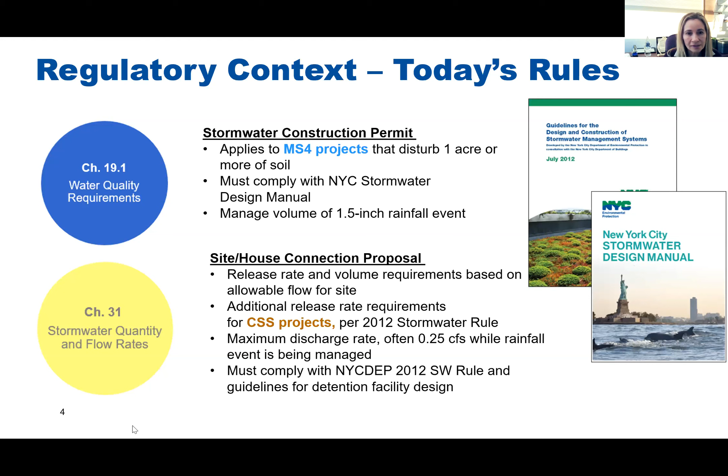And in the upcoming slides, what we would like to really focus on is how these two different requirements are going to be unified under our new rule, which is currently published, and give you enough details on how much work we have put together, working with many of you over the years, so that they are better aligned.

So, just to give you a brief highlight of what the unified rule is: our chapter 19.1 is going to be changing now, not only covering the separate storm sewer areas, but we are extending those requirements to the combined sewer system. So it's going to be one system for stormwater management.

We are also lowering the threshold from the 1 acre, which only applies in the MS4, to a citywide 20,000 square foot or more soil disturbance, and adding the creation of 5,000 square foot. So those requirements are becoming smaller in terms of the soil disturbance, and the spatial coverage is extended from the separately sewered areas to the combined sewer areas. So the system is going to become one system for stormwater management.

By doing so, we are indeed adding much flexibility in the stormwater management design options, which you are going to see in the design manual, which we will walk you through. But also we are simplifying the rules and making them very much consistent across the city. So there's not much more interpretation of how the different rules apply in different parts of the city. So now the stormwater management is going to come under the unified rule.

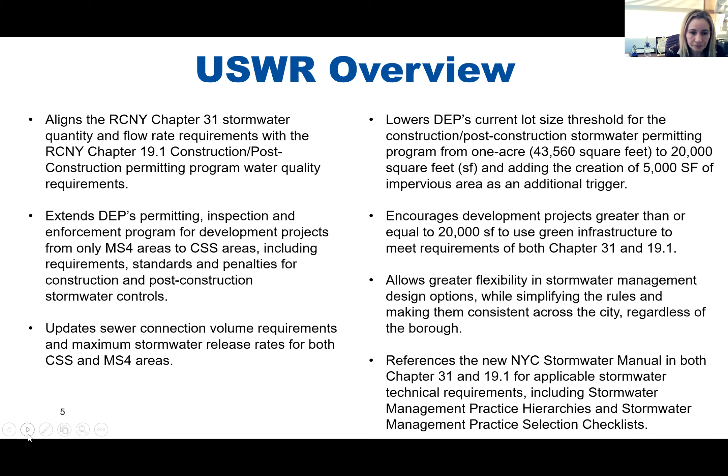Okay, so in creating the unified rule, what we looked at first is what we had, and we had the MS4 rules, the separate storm sewer rules in chapter 19.1, where the goal is primarily water quality, improving the water quality in and around the water bodies in the city. And then we had chapter 31, which really focuses on the system that carries the water, whether it's the combined sewer system or the separate sewer system. It focuses on making sure that that system operates well.

In trying to unify these rules, not only for our own convenience, but so that applicants coming to us with projects can benefit from that unification, we looked at how we could make this work better. So expanding chapter 19.1 into the combined sewer service area means that we're going to be able to have another way to reduce the flows that are causing combined sewer overflows and thereby improve water quality.

And our site and house connections are going to use the same standards throughout the city. So now, instead of looking at where I am and what storm applies in this area and what year map I have to look for this site, you're going to have a standard set of rules to use to size and create your sewer connections for your sewer connection certifications. And in doing that, we were able to create this overlap area of green infrastructure where we can get credit for one for another. And if we go to the next slide.

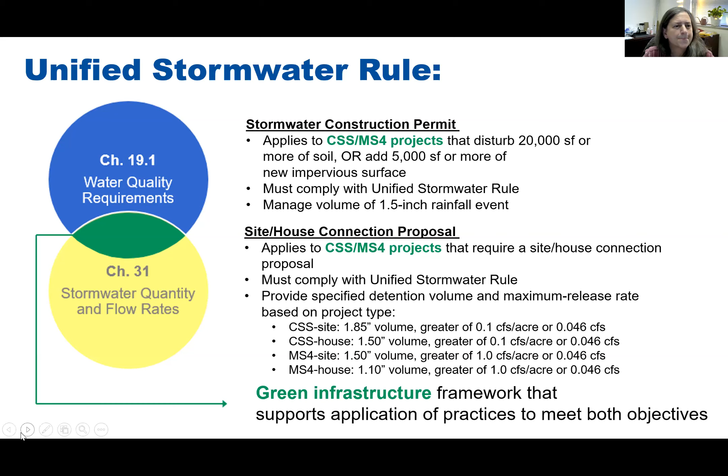So we've designed a new manual to help guide folks on exactly what you can do to get credit for both. So I'm designing one practice now, and I'm getting credit both for water quality in chapter 19.1 and for controlling my flow. Maybe it's one practice, maybe it's a system, maybe it's a group of practices, but I'm using them together instead of designing one thing for one part of the agency and one thing for the other part of the agency. So that overlap, I think, is really going to improve things for all of us, make it simpler, more direct.

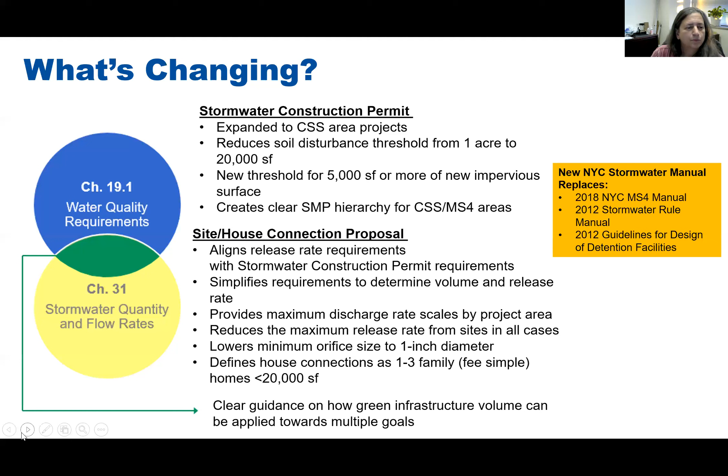Okay. So when we look at what's changing and how to get credit for both rules, we're looking to see what you have to do. Well, what you have to do is sort of the same thing as it was previously. So you still have to create the stormwater pollution prevention plan to cover chapter 19.1. You still have to submit that on the online stormwater permitting and tracking system.

And that plan has to cover erosion and sediment control. It has to cover water quality in terms of dealing with the water quality volume and making sure that we're capturing and treating an appropriate volume. Runoff reduction means we're actually requiring the reduction of runoff on all sites now. And no net increase means that where certain water bodies are receiving flow, we're addressing pollutants for that water body.

Additionally, for the site and house connection proposals, when they apply, you're still preparing that permit application and submitting it to BWSO in the same way that you've always done. But again, the goal is to manage the runoff and to control the volume and the flow that's leaving the site. And that's what's changing, is how much flow you're allowed to leave the site.

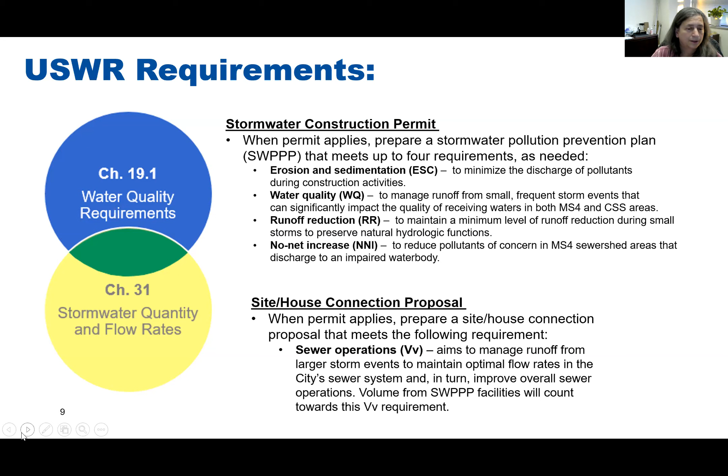So in looking at when don't I need to get a permit: if you're sponsoring a project in the city and it's in an MS4 area, a separate sewer area, and DEC, the New York State Department of Environmental Conservation, has issued coverage under the general permit before June 1st of 2019. That's when the first round, Chapter 19, became effective for the first time. If you have that letter of acknowledgement already, you don't need to get coverage under this part of the program,

under Chapter 19.1. If DEP has issued an MS4 SWPPP acceptance already within the last 2 years from the effective date of the Unified Stormwater Rule, again, you would not be required to get new coverage, but just be careful. It's within 2 years of the effective date. If you have an older approval, and there are just a few out there, those approvals do expire in 2 years. So make sure that you're on top of that. And if you need to get an extension on that approval, you do that.

Additionally, as of March 26, 2021, any project that disturbed 1 or more acres in either the combined sewer service area or the MS4 area is required to get a permit under Chapter 19.1. So if you applied to DOB or SBS for construction document approval before 3/26/21, and you can document that, then you would not be required to get coverage or to get a permit under Chapter 19.1.

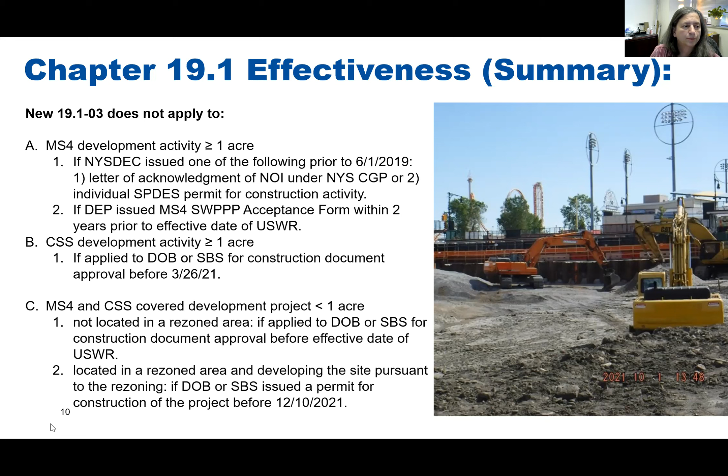So it's a little bit simpler for Chapter 31. If you already have a site connection certification, then you're good to go, except it doesn't apply to a site located in a rezoned area that is developing pursuant to that rezoning. And part of the reasoning for that, if I can get the next slide, is that for rezoned areas, you're going to be required to do a hydrology and hydraulics analysis prior to getting an approval for a new site connection.

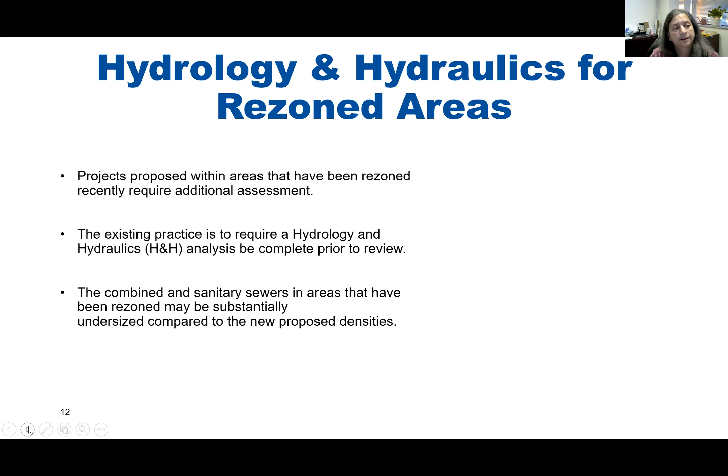The hydrology and hydraulics analysis is required because most rezonings increase density and use in the area that is rezoned. And because of that, that puts a great strain on the system, the pipes in the ground. So before the site connections are allowed to be made, you need to analyze that and see if the in-ground sewers can handle those flows. If they can't, something needs to be done about it. That system's got to be upgraded before any site connection certifications would be given. Next slide, please.

So Chapter 19.1 addresses water quality through the requirements for a stormwater pollution prevention plan. We also call that a SWPPP. And that leads to a stormwater construction permit. In the original stormwater design manual for the MS4 system, we developed a number of flow charts that made it very simple for anyone to figure out, do I need to get this approval and this permit? And we've done that again and added those into the manual.

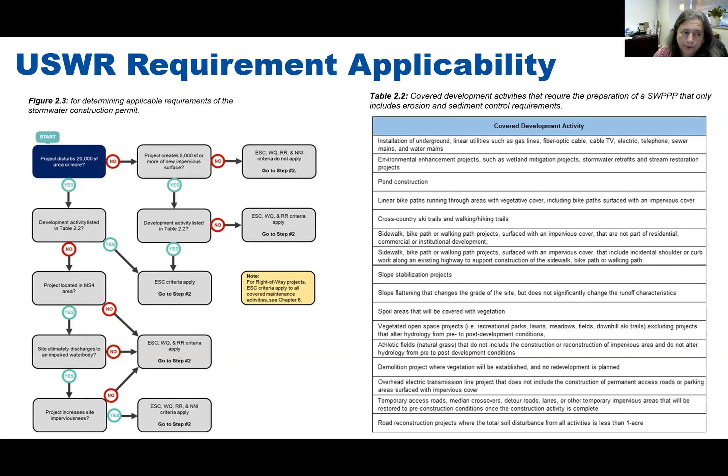Next slide, please. Thank you.

It also guides you through this, the same idea. You can see it's a little bit more straightforward for site connection, but it's the same idea. The project proposes a new site connection, yes or no. DOB requires a house or site connection, yes or no. And it gets you into the area, and then it takes you to the next step, to step 3. And each flow diagram goes into the next one so that it's a logical way for you to discern and decide, are we required to get a permit under chapter 19.1 and or a site connection certification?

So additionally, flow diagram 3 says, okay, here's all the parts of the report and the places in the manual where I can figure out what I need to include in my application and how does that application submittal happen. And again, that flow diagram number 3 is another one that's included in the manual that's going to be a lot of help to you and help you figure out what you're doing.

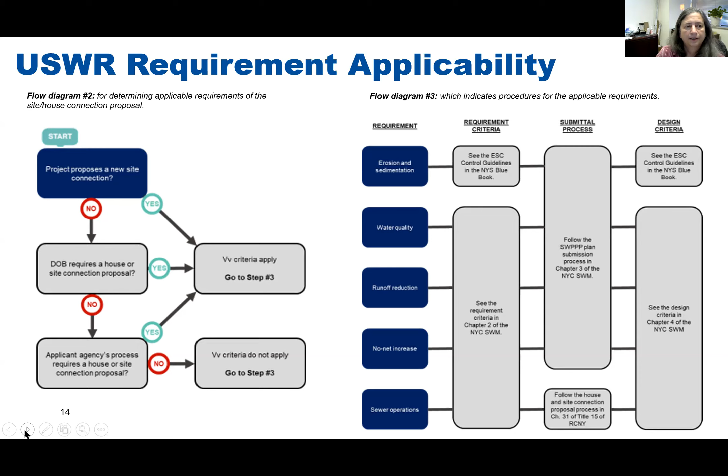Next slide, please. So to me, this is one of the most interesting slides because it shows you the parallel processes: the stormwater construction permit and the site house connection permit and approval process. Which one do I have to get first is the question I've heard more often than any other at this point. And the answer is, well, which one you apply for first is really up to you. But no matter which you apply for first, before you can get a stormwater construction permit, which means before you can actually start construction on a site, put a shovel in the ground, you need both your site connection proposal certification and your SWPPP approval or your SWPPP acceptance, which is essentially the same thing. And you need both of those in place before you can apply to get your stormwater construction permit.

Once you get your stormwater construction permit, then you may begin construction. And somewhere near the end of construction, usually folks go and they apply to the borough office to actually pull their site connection permit. The site connection permit gets pulled, they check the connection, they make sure everything is good, they give you your permit, and then, only then, when you have that in hand, can you apply for your notice of termination to close your stormwater construction permit. And if you're required to do post-construction practices, you'd also be required at this point to apply for your stormwater maintenance permit. So that would happen at this point in the process.

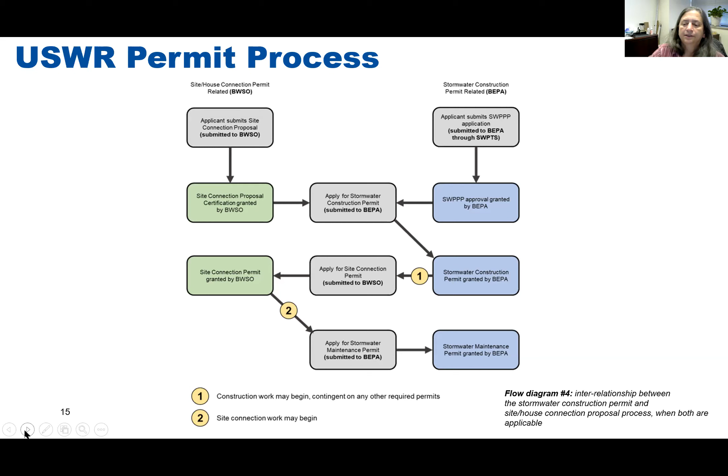Okay, thank you. And just to give you an idea of how complex this can be, this particular flow diagram, which is one of the more complex ones we have in the manual, shows you the overlap between DEP's Chapter 19.1 permitting process and DEC's notice of intent requirements. Now, when you look at this slide, everything that has that sort of gray bubbly shading on it requires a signature from DEP, from the city, before you can go to DEC and get something done. So the first one is right in the upper right-hand corner there. It says applicant submits DEP signed SWPPP acceptance form. And this looks a little bit different than it used to. No longer using the state permit. And if you've gotten an approval recently, you've probably seen the new format. But this is going to be just as good as the old state MS4 SWPPP acceptance.

So if you're doing something in the separately sewered area, you still have to go to DEC. You still have to apply. You still have to get the NOI and get coverage under the SPDES general permit for construction activities. And you go through that whole process. And before you can close that process, you need an NOT that has been signed by DEP. And it says that your site has reached final stabilization, and that either closes the permit or that your site's reached final stabilization and you've applied for coverage under a stormwater maintenance permit or for a stormwater maintenance permit from New York City DEP.

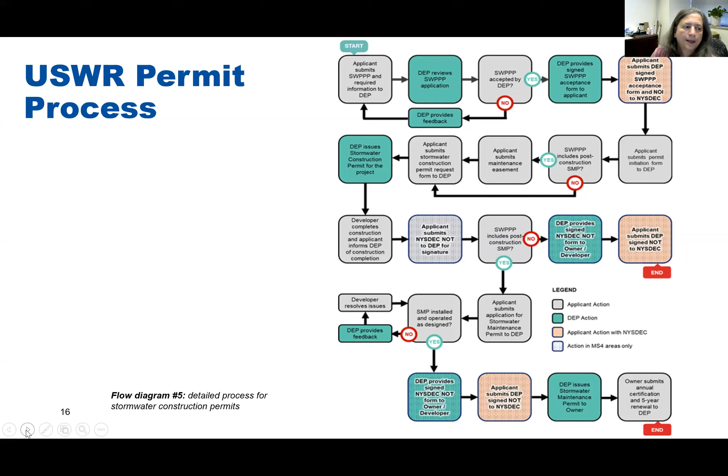So if you enjoyed those flowcharts that Peg showed on her slides, then you'll like our new New York City Stormwater Manual. It is very visual and graphic, and one of the things we really strived to do with this new Unified Stormwater Rule was convey first and foremost what we mean by retention first, or green infrastructure, or things that we are anticipating the design community to integrate into their projects.

And we took some lessons learned from some other cities across the nation who have very similar stormwater regulations. And in fact, our manual approach is based very closely off of the City of LA's stormwater manual, in that they have approached it from a function based category first. So we'll go over that in a minute. But the manual has 6 chapters. Chapter 1 is an introduction chapter, very basic, tells you what's in the manual.

Chapter 2 is a very important chapter. It covers the stormwater management requirements. It points back to the rules that you can view in draft form today, and explicitly tells you what is included in these regulatory requirements from both Chapter 19.1 and Chapter 31. Chapter 3 covers the city development and review requirements. So what this chapter is going to do is show you that workflow flow chart that Peg went over, that shows how both Chapter 19.1 and 31 permits get reviewed and approved.

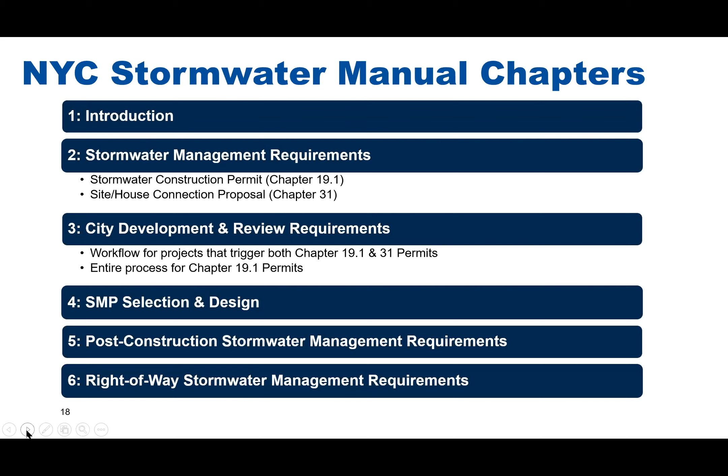And then lastly, we have a chapter dedicated to right-of-way stormwater management requirements. So there's a subset of covered development activity that is going to trigger Chapter 19.1 requirements. So we created a dedicated kind of mini manual just for those projects that goes step by step through design and maintenance requirements and so forth. So we'll go now right into Chapter 4.

So I mentioned that we took the approach for this manual to convey our guidance based on stormwater management practice function. And we'll get into why that's really important on the next slide, but I want to go over the definition of our stormwater management practice functions quickly so that you all can think about this as we cover the next few slides. So when we're talking about an infiltration practice, we're talking about a practice where stormwater runoff is captured and it's infiltrated into the underlying soils. This obviously requires sufficient permeability rates.

And when we're talking about infiltration, we're talking about practices that do not use under drains or outlet pipes, as we refer to them here, to drain the system. So a classic example of an infiltration practice is a bioretention practice. And if you're familiar with the New York City Green Infrastructure Program and our right-of-way rain gardens, then that is the classic example. Those rain gardens have no under drains or outlet pipes. They are infiltrating the stormwater runoff into the soils below.

The next practice is a filtration practice. This differs from an infiltration practice in that it does rely upon an outlet pipe to help drain the practice. So stormwater runoff is going through a filtration media. It helps to remove the various pollutants. And a classic example for those of you who are familiar with working within MS4 areas is a sand filter.

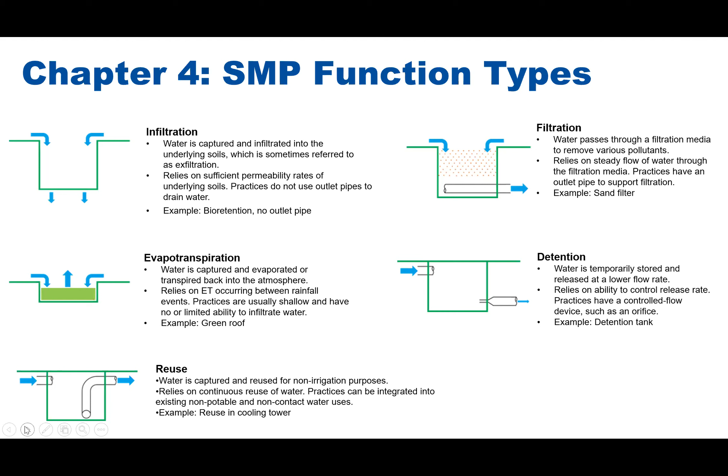And then the very last one, and not least, is stormwater reuse. So here, water is captured and reused for non-irrigation purposes. This practice relies on a continuous reuse of water, and the practices can be integrated into existing non-potable or non-contact water uses. So we do categorize this as retention in this particular example, because the stormwater is being completely removed from the sewer system because it's relying on that continuous reuse. And a classic example here is reuse in a cooling tower. So next slide.

So one of the reasons why we chose this function forward framework was that it allows designers maximum flexibility for selecting a few practices, but configuring them differently depending on the unique considerations of each site. So you can have one practice that can function different ways depending on how you design it. So the classic example, and the one we've included here on the right, is a stormwater planter. So the image on the top of the screen is showing a stormwater planter designed as an infiltration practice, where you see the various vegetation and media components and stormwater being infiltrated directly into the soils below it. So obviously, to be used on a site, this site would require good permeability rates in the soil.

Below it, we have the same stormwater planter being designed as a filtration device, where you have an outlet pipe that is configured into the system and is allowing stormwater to be drained from the practice through that outlet pipe and back to the sewer. So you have some stormwater pollutants being removed through the various media components, but this is indeed a filtration device, not an infiltration practice.

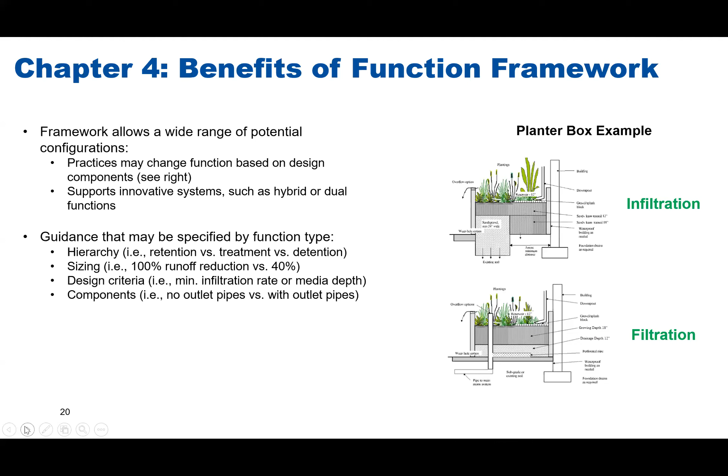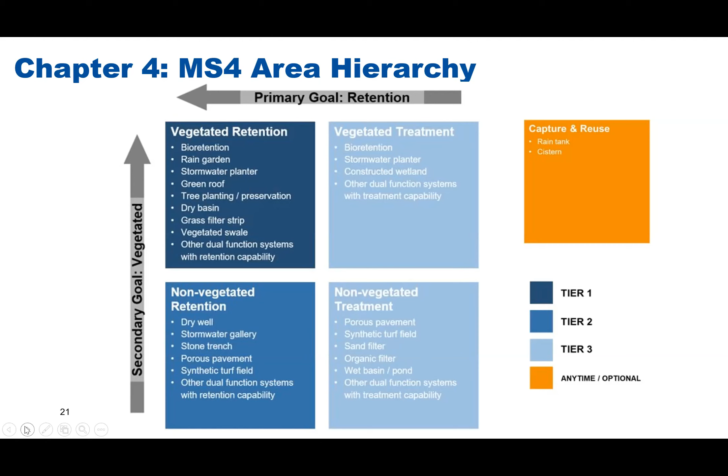So the other highlights, I won't go through all the practices because these are pretty straightforward, but the other highlights here are that as you move from the top of the hierarchy to the bottom, you'll see that we're going from vegetated retention to non-vegetated treatment. So if you rule out your top two tiers, the practices you're left with are practices that provide treatment. So stormwater pollutant reduction, but they do not have vegetation. And then to get to the bottom of that hierarchy, you have some specific constraints you have to demonstrate.

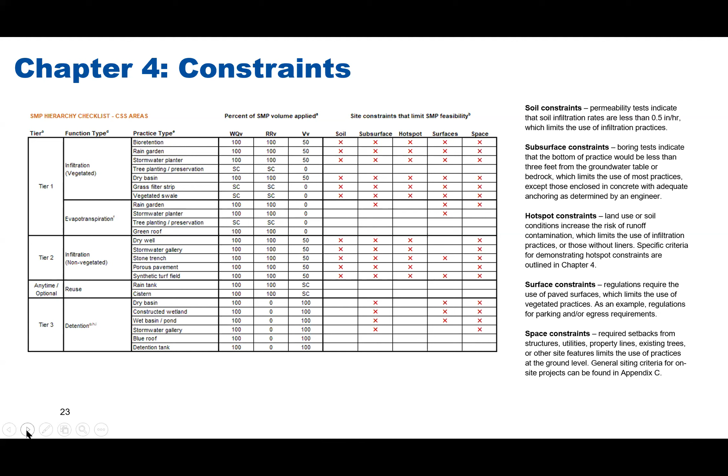Okay, so last slide, I think, on chapter 4. Again, chapter 4 is really the heart of this design manual. We have set it up to be extremely flexible in terms of choosing the practices that will meet the water quality volume or the VV or the runoff reduction requirements. But one thing to note is that you will find your sizing requirements in chapter 4. And so all of your practices have to be designed to store the amount of volume that's required for your particular stormwater management requirement.

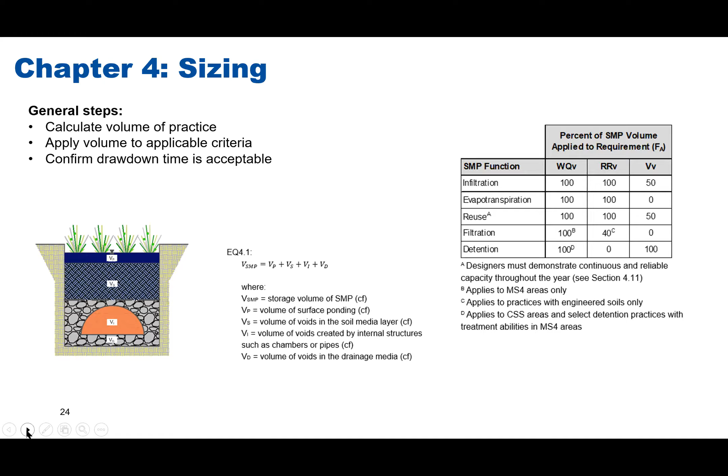So with that, I will turn it over to Gareth King, who is in our Bureau of Water and Sewer Operations, to go over some important manual appendices that we created.

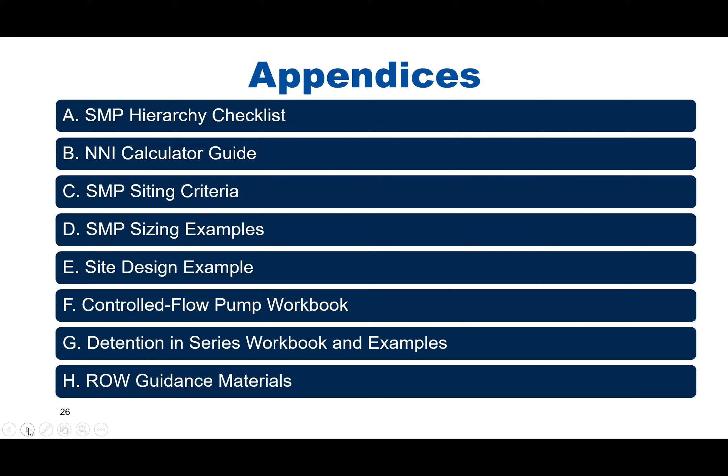Within the appendix, we also have extensive information about the best practices for operations and maintenance of the facilities, as well as some detail about the design of practices that have to be built within the right-of-way, which occasionally comes up. Could I go to the next slide, please?

We've also made public immediately our pump workbook and the specific requirements for the inputs that we need, as well as a short overview on how the process of iterating through to find the operating point is done. This just shows the Excel workbook, but there's also an explainer about how to fill out the various pieces of information.

The design process for meeting the requirements wasn't always clear compared to what a lot of applicants learn about pump design in school, because oftentimes one has to design a pump to discharge as quickly as possible, whereas we're trying to make sure that it doesn't exceed a specific number. We've also added additional functionality beyond our existing spreadsheet, where you can put in points on the pump curve and it can find the operating point automatically.

And if anybody has spreadsheet number 3 of our existing Excel spreadsheets, we can't do that right now, but if you copy over the information from your pump curve into some of the fields here, it basically figures out exactly how the pump will act based on the head losses. Could I go to the next slide, please?

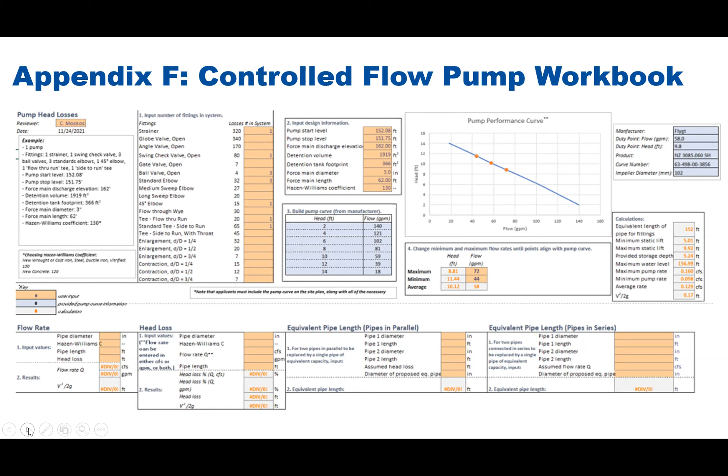And so Melissa noted earlier that the crediting of various volumes towards each set of requirements is going to be much more explicit. And it's very important to reiterate this because we want to make sure that we're not penalizing people if they build a system which works really well to meet Chapter 19 requirements. We don't want to say that they have to build another system as well to meet the Chapter 31 requirements.

But a lot of the work has been automated out of it. So we're going to use the same workbook in our review. It should make it faster to get things certified. And so this should reduce the number of resubmissions, and it should reduce the review time for all of the applications, which is important because we don't want to increase it from what it is now. That's it.

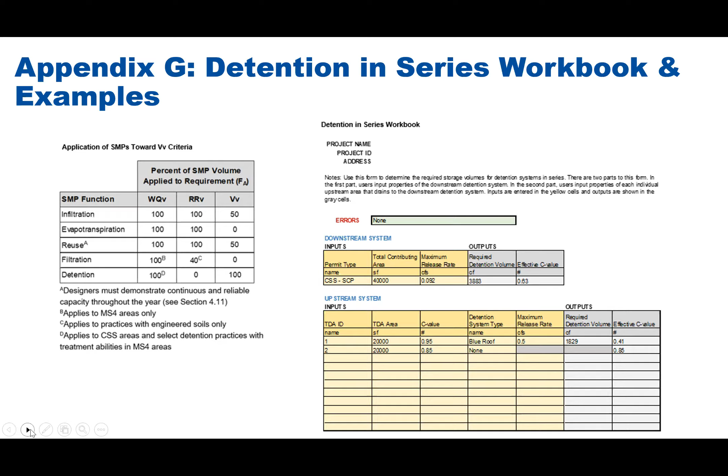Thank you, Gareth. Thank you, Peg and Melissa and Pinar. I know that we went through a lot of content and a lot of technical details, but before we close out, we do want to talk you through the next steps and what you can anticipate during this public comment time for the rule. So I'm sure all of you saw that the amended rules went live on the City Record on December 10th. And of course, we have today's informational briefing.

We've scheduled a second one on January 4th, but I should note that today's recording, as well as a PDF of the slides that were shared today, will be available on the DEP website by tomorrow. And we will circulate the presentation, the recording, and all of the links that are listed here on resources to everyone that registered for today's meeting. So we want to make all of this material as accessible to you as quickly as possible, so that you have time to review and to ask questions before the formal public hearing, which will be held on January 10th at 11 a.m. via Microsoft Teams, and we'll circulate that link to you as well.